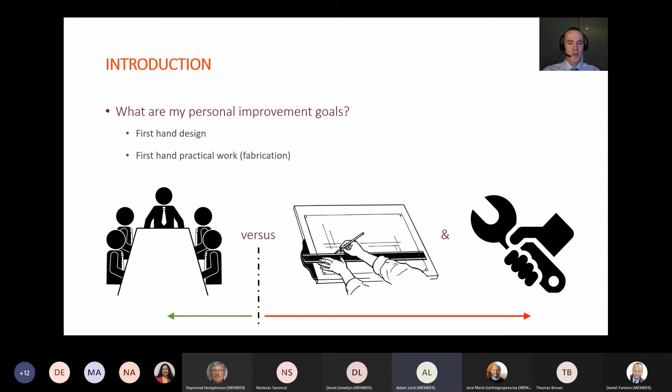So what are my personal improvement goals? I want to increase the amount of first-hand design work and first-hand practical work that I'm doing. If you look at the images at the bottom of the screen, I'm doing a lot of what's on the left, so a lot of work in the office, but less design and less fabrication than I would like.

So, inspiration to close these gaps. I was at the Greenwich Royal Observatory in the UK some years ago, and they've got an excellent section on mechanical timepieces. I was also at the Speelklok Museum in the Netherlands, which has an excellent display of mechanical music machines as well as clocks.

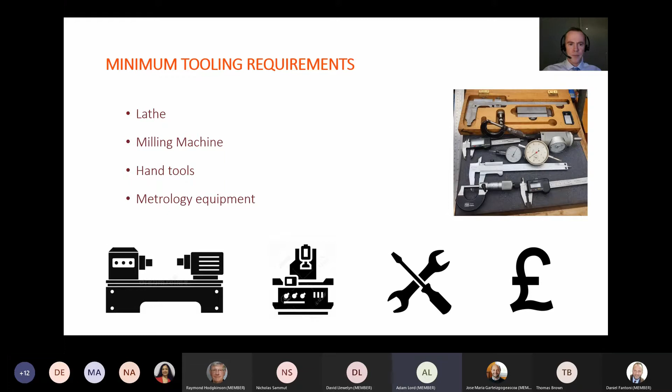What are the key skills that you need? First and foremost, you need patience. You can spend days and days working on the smallest of components, taking it from raw stock down to a finished component with high precision and high surface finish. You need technical drawing skills, both creating your own drawings and interpreting other people's drawings. You need a solid background in mathematics, physics, and engineering, as well as a good understanding of machine tool operation, where safety is paramount. You need to be skilled with hand tools and manual techniques such as riveting, broaching, and filing, and you need to be skilled up in heat treatment.

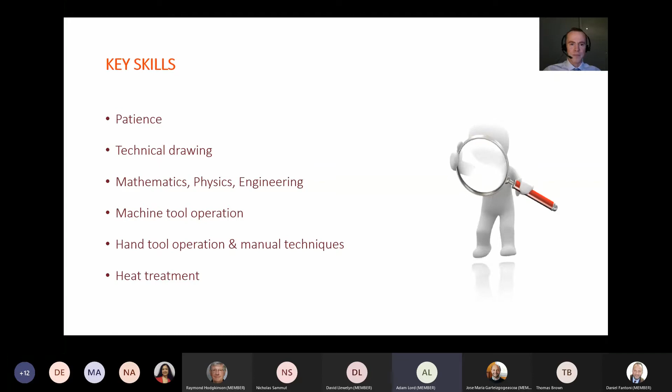In terms of selecting a project, I was browsing through a book on skeleton clocks and I saw a fantastic timepiece, an epicyclic skeleton clock designed by a gentleman called William Strutt in around the 1820s. He was a civil engineer and a member of the Royal Society. One of his famous quotes was that he wasn't that keen on documenting his previous projects, as he was much more keen on getting on to solve future projects and new problems.

So while some of his clocks remain, there were no plans or documentation on how they were designed and their dimensions. So some retrospective engineering was performed by Bill Smith around the year 2000, and he produced a set of plans to cover William Strutt's clock from the 1820s. I came across those plans and based my project around it. It's a fascinating timepiece - it's got an 8-day runtime, a spring-driven fusee, a Ferguson mechanical paradox motion work, and a stop work mechanism as well.

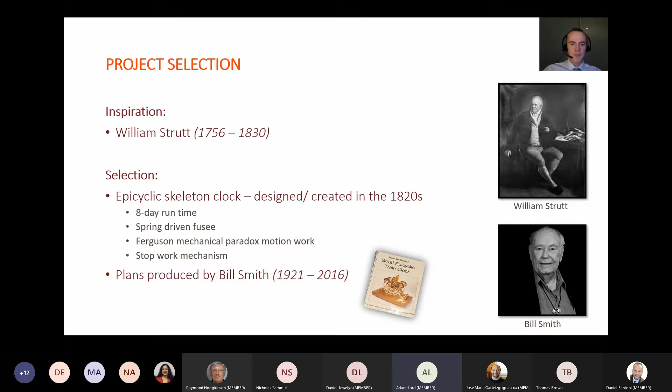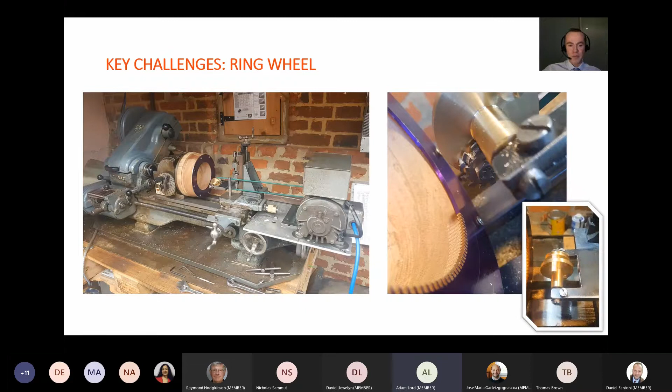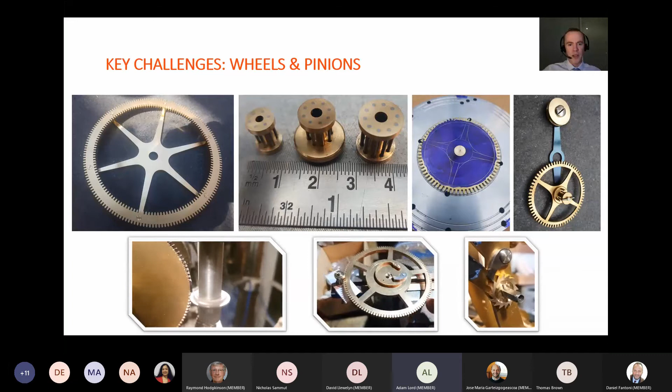You'll hear me talking about wheels and pinions. In horology, a wheel has typically got greater than or equal to 20 teeth, and a pinion will have less than 20 teeth.

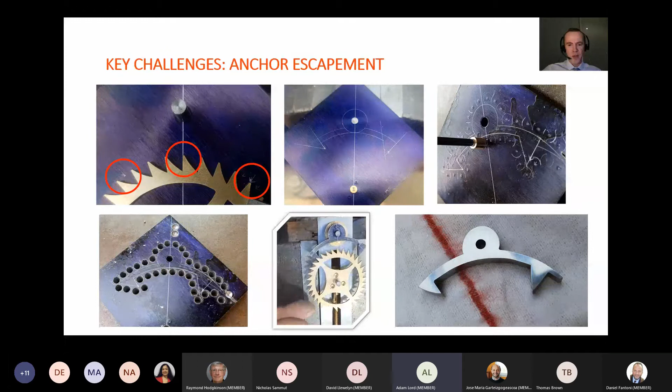Once the material's been removed and the anchor's polished, you can see it oscillating backwards and forwards on the escape wheel. On the far right, you see the final product, which has been polished and heat treated so that it's glass hard and ready for a long service life with very limited wear.

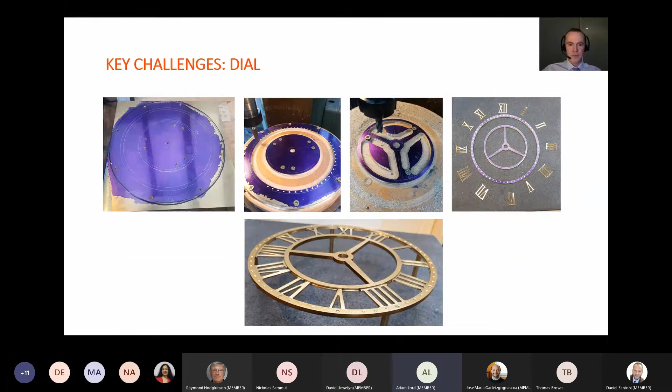The pendulum bob. Traditionally on the lathe, you're either feeding in X or Z at any one point in time, but the pendulum bob typically has a nice curved surface on it, and to achieve such a surface I had to learn a new skill, which was graving, which is essentially turning metal by hand.

Once you've achieved the rough profile, then it's a sanding and polishing operation to impart a mirror finish. Once that's been achieved on one side, then it's cutting the workpiece off, turning it around on a mandrel, and then repeating on the opposite side until you're left with a traditional pendulum bob and a rod as well.

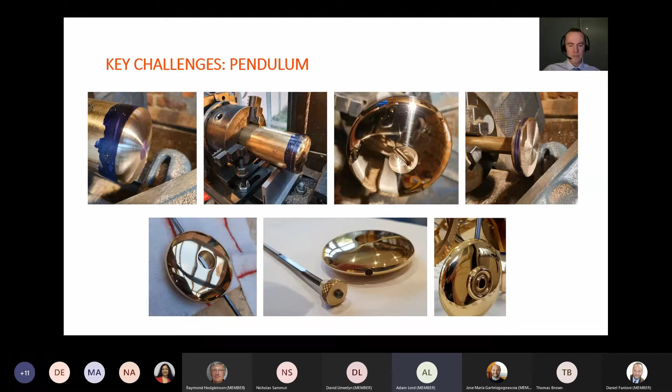Moving on to the fusee. This is a spring-driven clock, and as the spring winds down, it reduces the force that can be applied. So what that would mean is your torque being delivered through the drivetrain of the clock would decrease as the spring winds down. The fusee tries to compensate for that.

This fusee is shaped with a curve here in order to approximate a consistent level of torque being applied through the drivetrain of the clock as the spring goes through its fully wound state until it's in its more unwound state. Quite a tricky operation to thread on a curved surface on a manual lathe, so that was a skill that needed to be learnt for this operation.

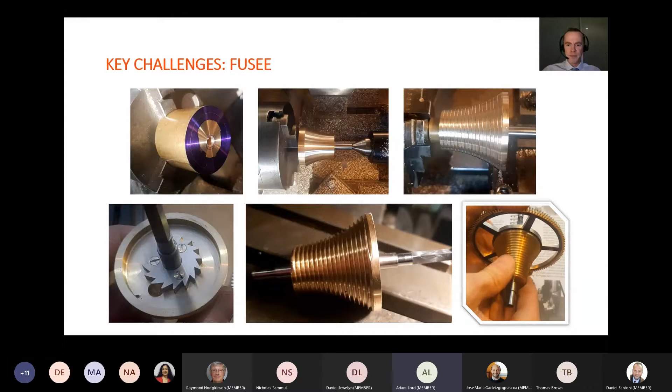On the bottom right, you see the fusee mounted on the great wheel with its ratchet in operation. And then this is the finished clock. Approximately 500 hours of work went into this.

It would undoubtedly be quicker second time around because I've learnt many lessons along the way. Whilst your finished product is a clock, you need a lot of custom-made tooling and a lot of custom-made jigs to create the clock. If I was to build a second one, all that tooling and jig work has already been completed, so there is a potential for significant time savings if it was ever to be a repeat project.

What about my learnings? A couple of famous phrases up at the top: measure twice and cut once. It's a rule I live by. It doesn't always work - sometimes I wish I'd measured three times and cut once - but certainly a good rule to follow. And buy cheap, buy twice.

On a project like this, it's so helpful to have high quality tooling. And by high quality, I don't necessarily mean new. You can often get high quality at a cheap price by buying used.

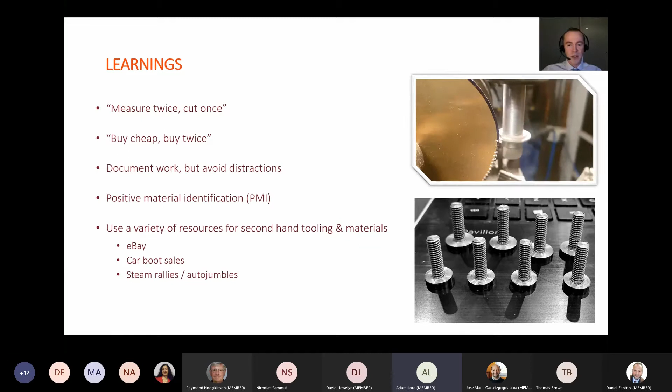What does the future hold? Well, potentially designing a clock from scratch and then fabricating it according to my own plans. But certainly horology will be remaining a hobby and a passion of mine. It really is a good challenge that I enjoy.

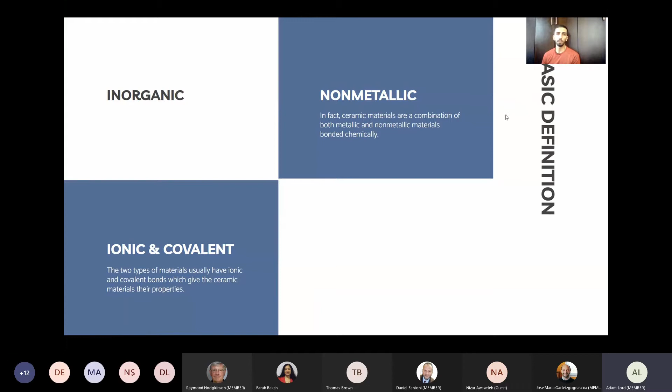So here we see how they depart from metals in being hard and brittle, compared to metals which are ductile. And that can be useful in whatever specific case where hardness and brittleness is desired or required.

They're also great insulators. They're great thermal and electrical insulators, and that is due to their chemical bonds, which do not allow largely the movement of free electrons, which reduces greatly conductivity. They're also very chemically stable due to those chemical bonds. They're also physically wear resistant and very durable, and that is due to their crystalline structure, which is very strong.

Now here, a traditional process of how a ceramic material might traditionally be manufactured. Well, it starts off with the raw materials, which are usually found in powder form. These raw powders are then maybe mixed with additives, depending on our specific situation and any desired properties that we need from those additives. And then when the additives are mixed in, the powders and the additives might be formed into a mold or a cast and compressed, which sees us reach the green state, or the green form as it is known in the industry.

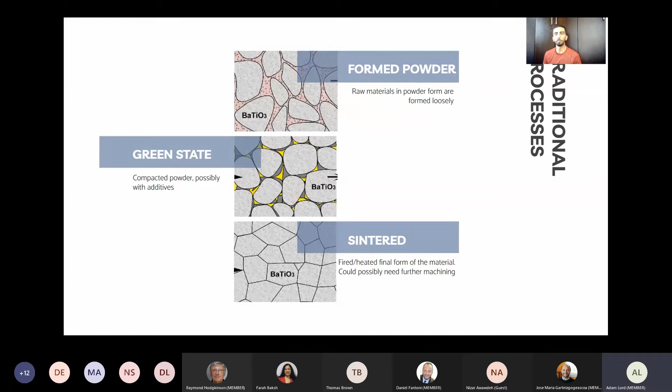Now in this form, we can see in the pictures attached here, the material still has a lot of defects, still has a lot of room for error, for weakness. But it also is a little bit more compact than the raw form. Now we take this green form or green state to be sintered or fired or heated into the final form by reaching specific temperatures, where you can see the crystalline structure form a more compact monolith. Instead of a material with a lot of defects, we have very minimal defects in the final form.

Now, more advanced processes to reach higher and better, more superior properties would see us use rheology, which is the study of flow of materials. Now, this is usually used for fluids, liquids, or gases. However, soft, or in quotation, soft solids, such as powders, can be studied through rheology, and that can help us study how the raw materials would be formed into the mold or cast or press, or however form of manufacturing we would use. That would also help us through the green state of, or the green form of the manufacturing process.

Next is isostatic pressing. It is one of many modern techniques used for the manufacturing of ceramic materials. In isostatic pressing, the raw materials are put into flexible molds, and then those molds with the raw materials inside are submerged into a pressure tank full of water, where that tank would be pressurized, leading to the pressure being divided equally along the whole flexible mold, which is why it is flexible. It allows for the manufacturing of more complex shapes, possibly, and more uniform manufacturing.

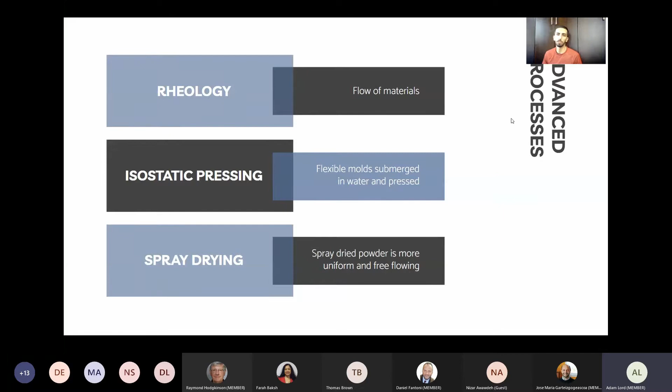There's also the process of spray drying. Spray drying is used for the raw powders, which allows us to create more uniform and free-flowing powders, which are easier to deal with and creates a more uniform and compact final product. Possibly leads to it being stronger or just easier to work with, whatever the situation may be.

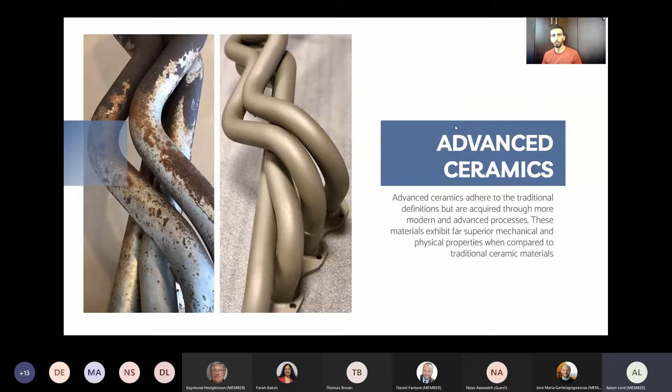Well, it is very durable. The carbon silicon carbide material used for these braking systems has a very strong crystalline structure, pretty similar to that out of diamond, not as strong as diamond, but fairly strong and much stronger than traditional systems using steel.

The silicon carbide is also very heat resistant. And heat resistance in braking systems would greatly reduce the dangerous effects of brake fade.

Brake fade is when braking systems lose performance, possibly stop working suddenly due to the braking fluid boiling, or whatever it may be, due to extreme heat during excessive and repeated wear. This usually happens on a racing track, in sports cars and race cars. Repetitive and aggressive use of the brakes would raise the temperatures really high, up to a point where the braking system might fail. Carbon ceramic brakes greatly reduce those dangerous effects due to their great heat resistance.

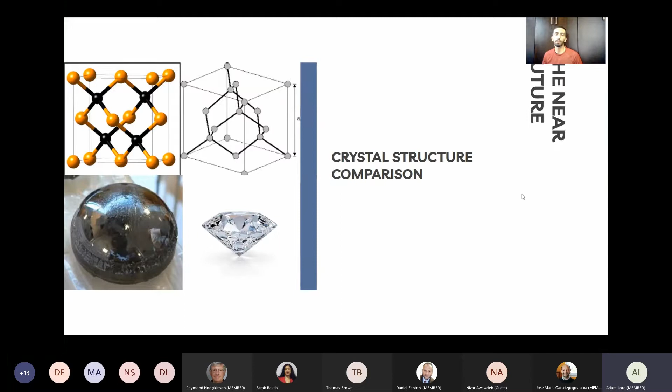And here is the crystal structure I've talked about. Here is silicon carbide on the left with this crystal structure above it. Next to it on the right is the diamond crystal structure. It is not as strong as diamond, but fairly strong and much stronger than steel.

The next highlighted application, also in the automotive industry, is catalytic converters. Catalytic converters are used for emissions control, to control the harmful byproducts of internal combustion. Here a ceramic monolith is used as the base for the metal catalysts used in the chemical reaction. These ceramic monoliths are used for their heat resistance and chemical stability through all those chemical reactions.

Also with their thermal resistance and heat resistance, these catalytic converters can reach operating temperatures up to 1000 degrees Celsius. A material which can take heat very well is very desired, which is why a ceramic monolith would be used in this case.

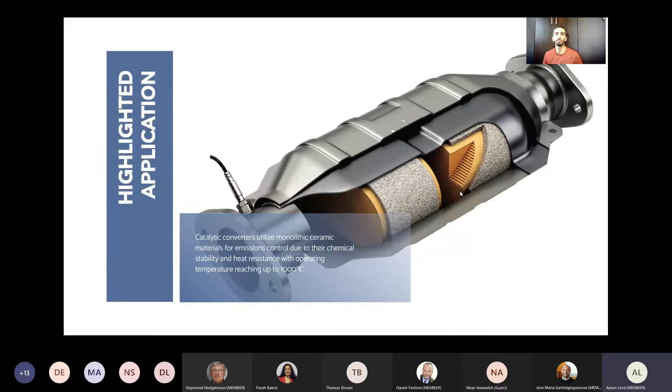Now, to the slightly more exciting part of the presentation, the near future. And I say near future since these are fairly new research papers talking about the future of this field.

The first one is discussing coatings modified with aluminum oxide, used as thermal barriers for advanced gas turbine engines. This research has shown that ceramic coatings modified with aluminum oxide perform thermally far better than traditional designs in uses for gas turbine engines. That could possibly be put to use very soon in the near future.

The next one is high entropy ceramics, where researchers employed artificial intelligence and machine learning to possibly predict formations of high entropy ceramics. This is a great breakthrough using artificial intelligence.

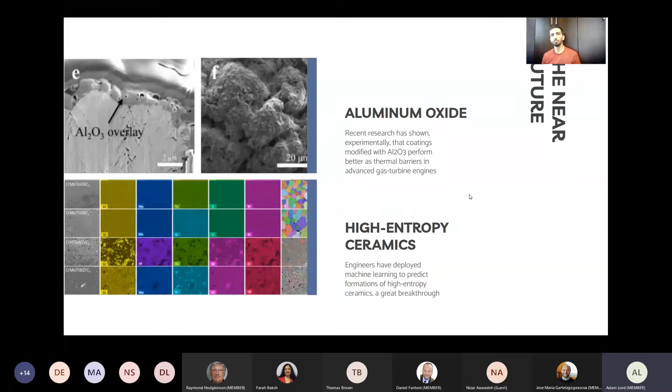It's very exciting. But one thing is, while I was researching this, I did not know exactly what high entropy materials are. So I did a little quick research, and I found it is a fairly new term, which is why I hadn't heard of it until recently. It is a term coined for materials or alloys using multiple different materials in high concentrations, instead of having one main element with additives added on top. High entropy materials or alloys have multiple elements in high concentrations.

Since we were talking about artificial intelligence and machine learning, it makes the future look uncertain, since it's all just predictions of artificial intelligence. However, the present sure does look exciting, as well as the near future.

We are engineers, and for every true engineer, our profession is all about constant change and continual improvement. It's about innovation, about finding ways to make the world work better. And right now, engineering is evolving faster than ever. Outward looking and open to new ideas, it has never been more exciting and daring.

I think machine learning and artificial intelligence will take huge steps forward. Simulation is going to play a more important role. Without a doubt, it will be increased computing power. AI is the electricity of the future. Quantum computers. Low carbon technologies. Cutting down on fossil fuels, making the way we make energy a lot more green.

Getting energy in a sustainable and environmentally friendly manner. I think it's the potential to make a real difference in the world, both in terms of the environment and the economy, boosting the efficiency of how we use energy. And in this dynamic environment, the way we learn, the way we live and work has changed.

Information is instant and everywhere. Knowledge has broken down boundaries. Engineering disciplines are converging, yet engineering careers are diversifying. Everyone and everything is multidisciplinary. The silos and boxes have gone. Artificial intelligence is reframing what is possible. And being an authority is no longer simple or easy.

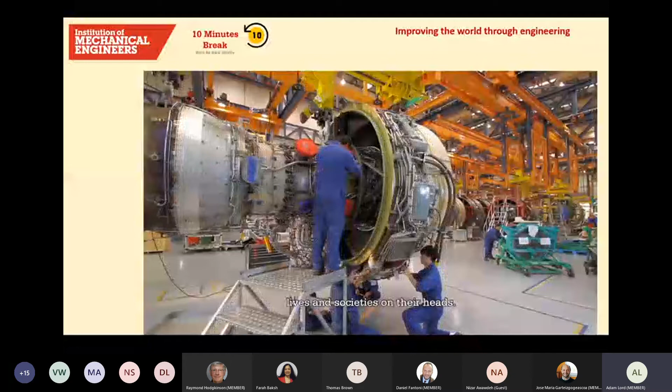The emerging generation of engineers demand relevance, 24/7, 365 days a year. And now that any innovation can turn markets, lives and societies on their heads, they want the opportunity to take responsibility. So what will the institution of the future look like? How will it need to evolve to keep future generations engaged and inspired?

I'd like to be part of a community of engineers that embraces the exchange of ideas. I don't like being siloed. By working all together, we can see the bigger picture. I like to belong to a community where there's plenty of professionals coming from complete outside engineering.

We need to share across disciplines. I think cross knowledge becomes way more important. We cannot just become purely mechanical engineers. We have to have also knowledge from, for example, electrical engineering. But also, during this crossover communication, innovation is often spurred.

Engineers in the future will need programming skills and software skills to better integrate the mechanical system with the software, to promote automation. I'd also like to be able to take any problem to them at any point and receive guidance and encouragement, coming together and really solving problems together as one.

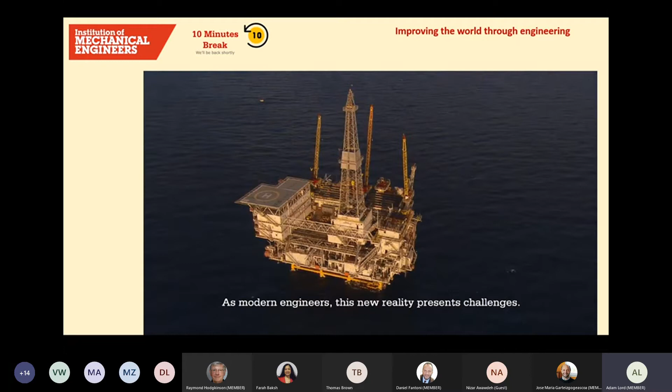As modern engineers, this new reality presents challenges. But most importantly, it presents opportunities. Opportunities to innovate, to invent, to inspire, to create a truly global engineering community.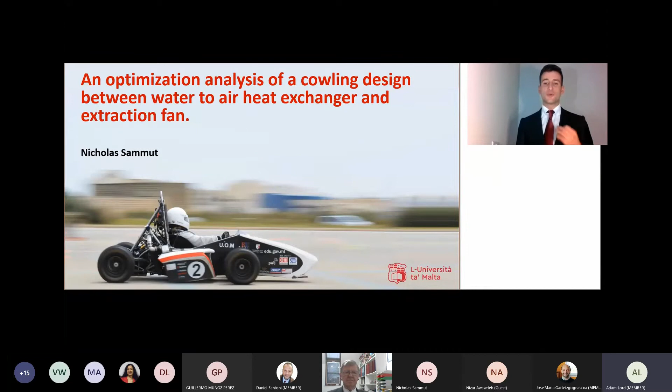Good afternoon everyone, and welcome to my presentation. My name is Nicholas Sammut from Malta, and I'd like to start off by thanking you all for being here and for giving me the opportunity to present my engineering project, which also happened to be my final year dissertation. My project was carried out as part of a much bigger picture, Formula Student, Europe's most established educational motorsport competition, where top universities from all over the world are challenged to design, fabricate, and compete with a Formula-style race car.

Events are split depending on whether they are dynamic or static. The dynamic events test the car's driving ability through the acceleration, autocross or sprint event, a test of handling called skid pad, and finally the endurance event, which is arguably the most challenging and requires the car to drive for around 22 kilometers. On the other hand, static events consist of presentations, and they test the teams in all aspects, including the design of the entire car from an engineering perspective, the ability to budget and account for every part financially in the cost presentation, and finally, actually pitching the car as a product using a complete and holistic business plan.

UoM Racing is our own Maltese Formula Student team. It is made up of over 30 highly dedicated students whose main aim is to represent our country in Formula Student competitions abroad. In fact, our last major competition took place in Silverstone in summer 2018, where we finished 28th place out of 82 teams.

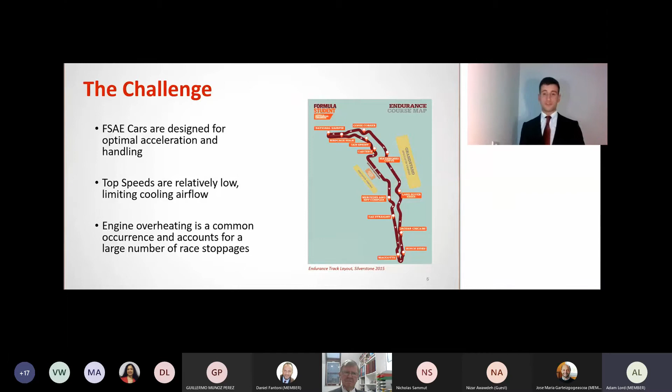Formula Student race cars are designed around a set of very rigid rules. While they are engineered to have high performance in terms of acceleration and handling, they're also designed to operate at relatively low speeds, rarely exceeding 100 kilometers an hour. This is because races typically take place around a very confined track consisting of tight corners, and it is those racing conditions which often push engines to their limits and put a large strain on the vehicle's cooling system. This ultimately results in hot fluid temperatures which exceed the engine's maximum operating range.

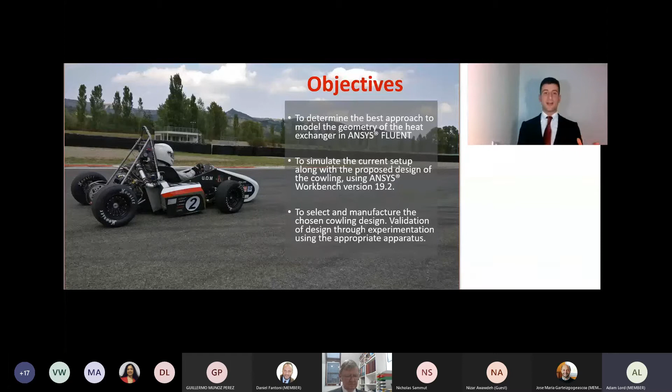This problem was addressed by first determining the most suitable approach to modeling the heat exchanger. Several different approaches can be taken to improve the heat transfer to a radiator, but the main objective of this project was to design and simulate a shroud system to increase the total mass flow rate of air through the radiator, thereby improving the overall rate of convective heat transfer.

This presentation will take you through the entire design process of the shroud, from the first principles and simulation up to the manufacture, and finally the experimental validation of the part.

According to literature, conventional modeling of the heat exchanger would require an excessively large number of elements due to the complex geometry of the radiator fins. An alternative approach, however, is to model the heat exchanger as a porous medium.

To do this successfully, ANSYS Fluent, the software used for this dissertation, requires the user to define two important parameters: firstly, the inertial resistance coefficient, and secondly, the viscous resistance coefficient. For a heat exchanger, the most suitable approach to determine these coefficients is through its pressure drop data, typically in the form of a relationship between the incident airspeed and the corresponding pressure drop across the heat exchanger core. However, the team made use of a custom-made radiator, and with no data sheets available,

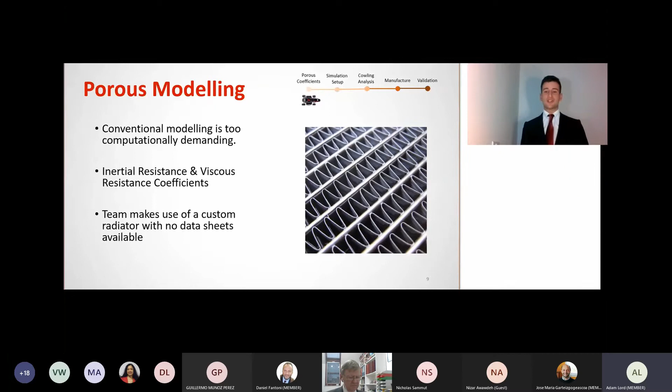these coefficients had to be obtained experimentally in the faculty's wind tunnel lab.

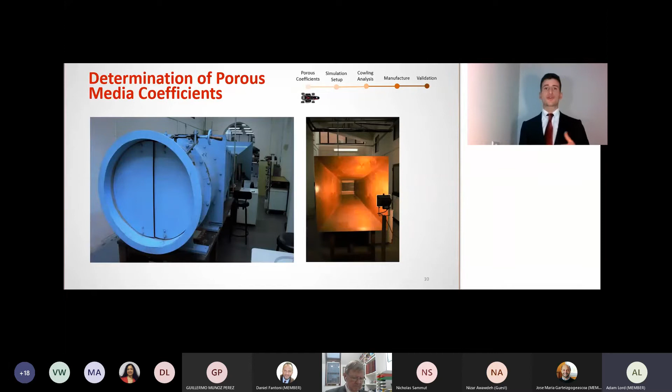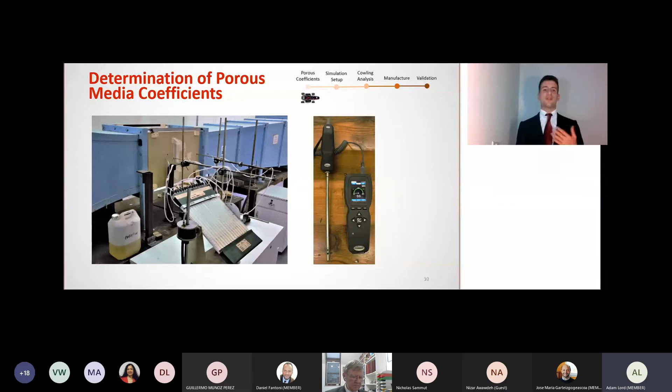The figures here illustrate the experimental setup used for the experiment. The radiator's cross-section was mounted inside the wind tunnel, and a hot wire anemometer was placed in front of the radiator and used to measure the inflow speed. Also, a pitot static tube was placed both in front and behind the radiator to measure the static pressure drop across it. On top of this, additional static pressure ports were created on the walls of the wind tunnel as a reference to increase the level of reliability in the experiment.

The next stage of the project involved computational fluid dynamics software. CFD was first tackled by modeling the current cooling setup at the time, which had the extraction fan directly stuck onto the back of the radiator core.

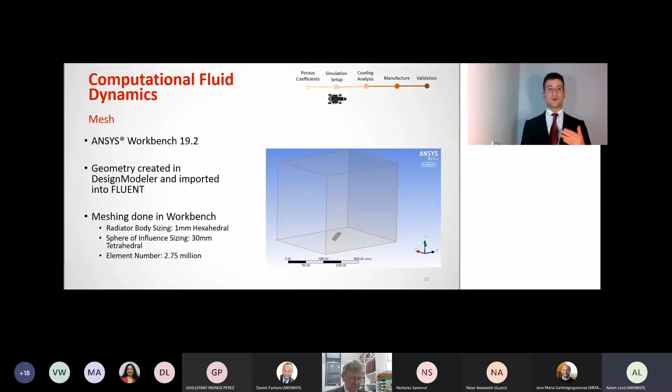This setup was first meshed in ANSYS Workbench, where a fine hexahedral mesh was used for the radiator itself, with a sphere of influence surrounding the zone deemed most crucial. Using a sphere of influence to mesh this localized zone was very helpful, as it allowed for the creation of a much finer mesh to better capture fluid behavior around the radiator.

The accuracy of the mesh was validated through a grid-independent study, and a domain-independent study was also carried out to ensure that the size of the fluid domain used was sufficient to capture the entire behavior of the flow.

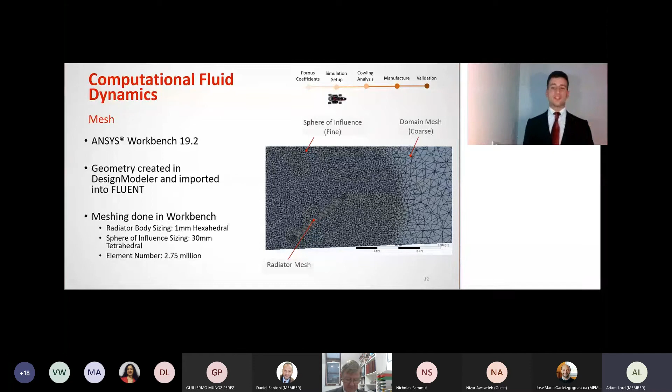The first step in creating the fluid simulation was setting up the correct boundary conditions and viscous model. Through the literature study, it was determined that the K-epsilon realizable model was the most suitable for this application. It is often presented as the default model setting in many commercial software packages.

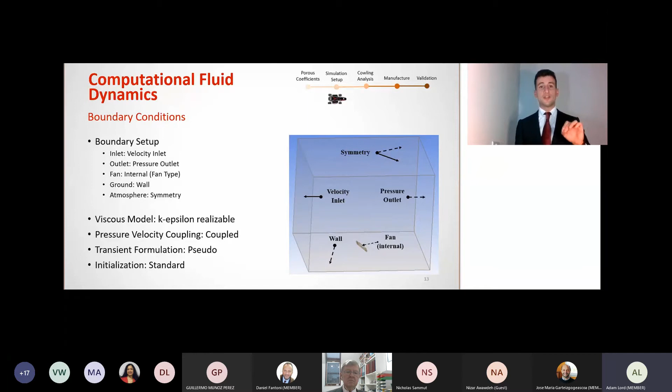After importing this model into ANSYS Fluent, the radiator could then be defined as the porous zone, and it was at this point where the coefficients obtained previously could be input for the relevant direction vector of the flow.

The fan itself was declared as an internal fan zone, modeled as a specified pressure jump. This was done by first obtaining the pressure drop data sheets provided by the fan manufacturer.

Post-processing was done on simulations both with and without the fan, to compare both models and ensure that the fan was operating as expected. In all simulations to follow, the velocity and static pressure were the variables of interest.

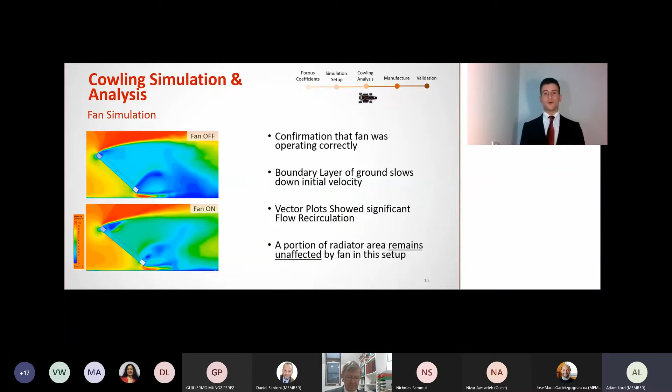Once the original radiator configuration was correctly set up, the next step was to design the shroud and analyze its effects on the airflow. These figures illustrate one of the runs at 4 meters per second.

One can see how without the shroud, the pressure drop is again localized around the fan area only, while with the shroud mounted, the entire portion of the radiator is affected by the pressure drop.

These effects can be most visibly seen in the graph alongside the contours, which plots the air inflow speed against the mass flow rate, plotted for both configurations.

The mass flow rate was obtained using Fluent by finding the surface integral for mass flow rate at the radiator interface. As expected, the mass flow rate with the cowling is significantly more than without.

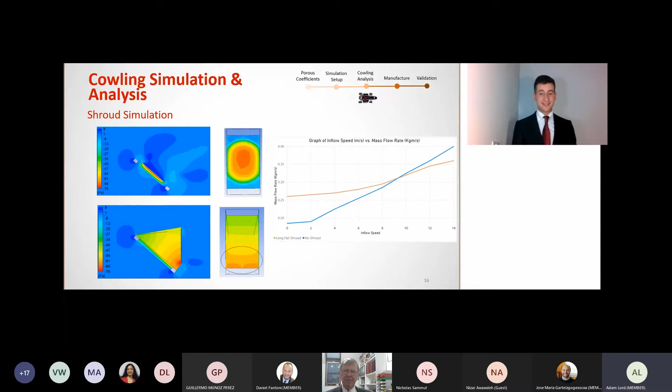However, this effect is most notable at lower speeds, and beyond a certain speed, not only do the mass flow rates level out, but at higher speeds the shroud actually begins to act as a blockage and has a negative effect on the mass flow rate. But having said this, it is at these speeds that the effect is most critical.

Over here we have a graph which shows the speed of one of our race cars in a typical endurance event, lasting for 22 kilometers. Many times the speed of the car is seen to dip well below 10 meters per second, probably when turning a tight corner, for example.

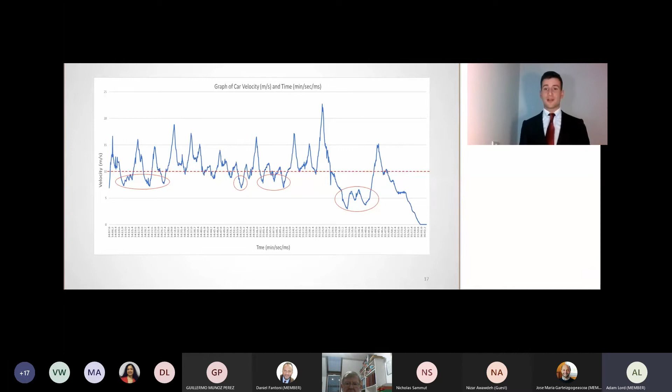But this is when it becomes important. On top of this, midway through the endurance race, there is a required driver's change, where the car ignition must be turned off as the driver transitions, but the fan can be left on. At this stage, engine overheating is a very common occurrence in competition during this time because of the lack of airflow, and so the introduction of a shroud can produce mass flow rates when idle which are comparable to when the car is traveling at 6 meters per second without a shroud configuration.

With the potential effects of the shroud clearly visible, the next step was to analyze different geometries and their mass flow rates with the shroud. Surprisingly, 5 different cowling designs produced extremely similar mass flow rates, but what was different was the way that the flow was distributed for each shroud design.

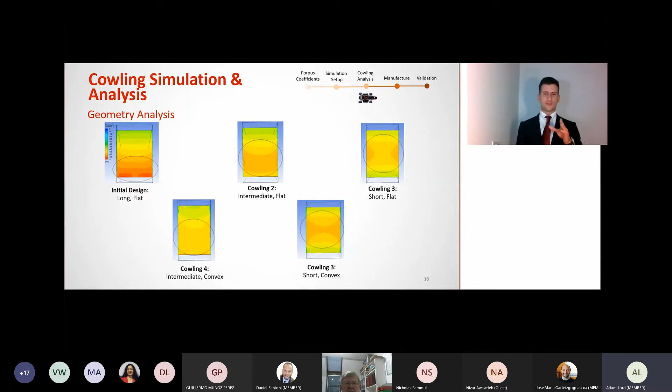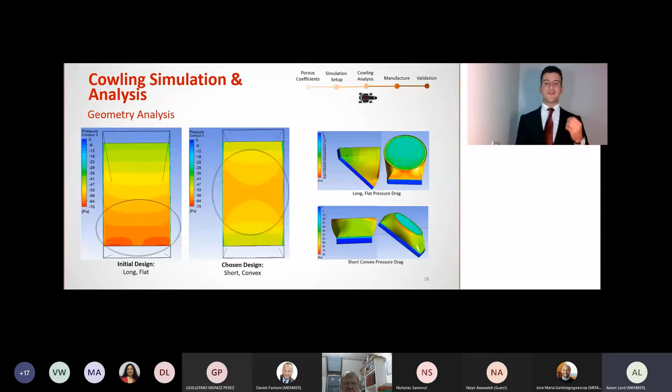In fact, the distribution of flow for the initial design, as you can see in the first visual, is not even. The largest pressure drop is concentrated in a localized area towards the bottom portion of the radiator. By shortening the shroud geometry and introducing a more convex shape, flow distribution was actually improved. The drag over the cowlings was also examined and found to have negligible effects on performance. So in the end, the short convex shroud was chosen for manufacture, firstly for being the lightest design, but most importantly, for showing the most ideal flow simulation and flow distribution.

It was then decided that the material used for manufacture would be carbon fiber because of its lightweight nature and its high temperature resistance. In addition, the team has been fairly experienced in carbon fiber manufacture and has had the resources available to carry out a task such as this.

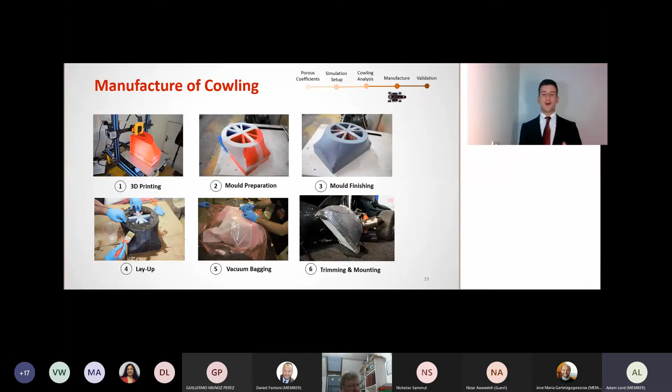The mold itself was 3D printed due to the complex convex geometry, and this was followed by a carbon fiber wet layup under vacuum. Not only is the wet layup technique the simplest and cheapest method of composite manufacture, but it allowed for the part to be cured at room temperature, posing no risk of melting the mold it was based from.

And this is the final result: the entire configuration of the shroud, radiator, and cooling fan.

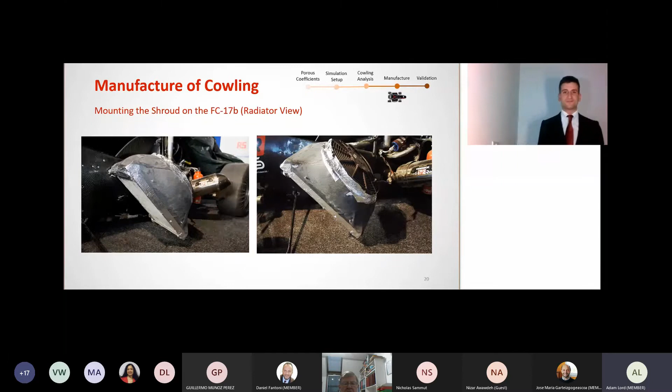Now, a critical part of any computational simulation is establishing a reasonable amount of confidence in the results obtained. So validation of the CFD simulations was done in two parts. The first part consisted of a non-invasive experiment focused on finding an area-weighted average of the velocity of inflow through the radiator, using a hot wire anemometer to record the inflow air velocity at several marked points on the radiator face, as you can see in the picture here. An identical simulation was then set up in ANSYS and compared to experimental results.

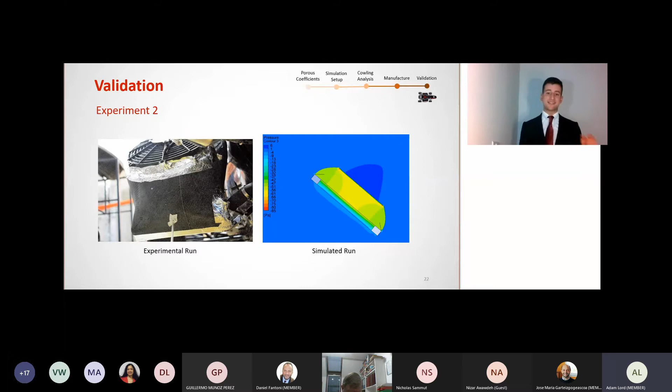The second part involved a single static pressure tapping at a suitable location on the shroud, allowing for a direct comparison to the pressure found at the same location in the simulation. A discrepancy of 17.7% was found in the first experiment, and similarly 17% in the second. This level of discrepancy was deemed sufficient, especially since the fan was simply modeled as a pressure jump, ignoring the effects of swirl and the fan blades.

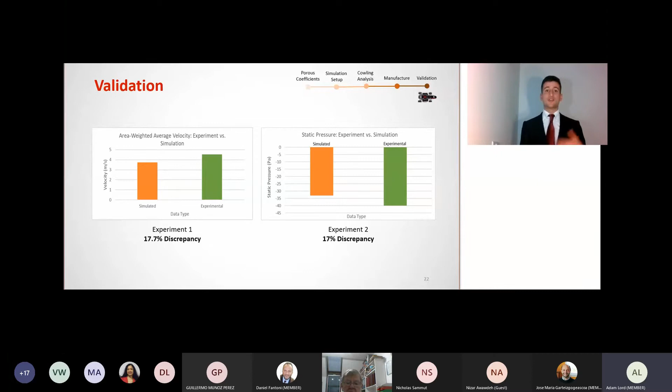So it was concluded that there was enough confidence in the study for it to be replicated and developed on in future simulations by the team. The successful modeling of the radiator's air domain in reality was just the first step to obtaining a complete heat transfer simulation of the heat exchanger. Together with a working model of the radiator's water domain, the ultimate objective is to be able to accurately size the radiator via simulation.

Similarly, as well as the radiator, a separate study can be focused on obtaining an accurate model of the fan itself, perhaps by using the moving reference frame approach. Optimization of the fan itself could bring a lot of potential benefits to the race car, namely significant mass reduction and energy savings on the power budget of the car.

I would say that overall, the most rewarding part of this project was being able to contribute to the team after being in it for my whole university career. And it was great being able to widen my knowledge in computational fluid dynamics, especially, and this giving the team the ability to have a more competitive edge in its future Formula Student endeavors.

So that was my presentation. I hope you enjoyed it, and I'd be more than willing to answer any of your questions.

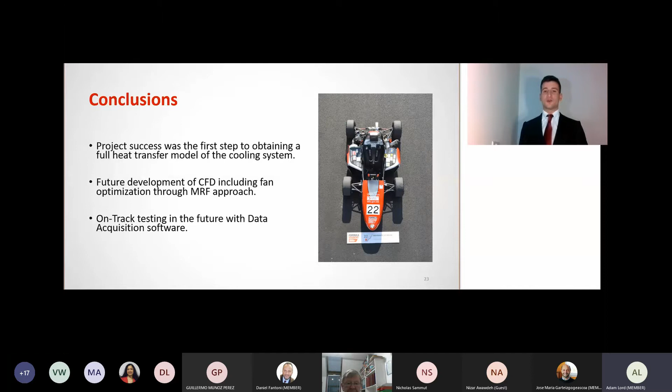Thank you very much, Nicholas. Back to you, Raymond. Daniel, would you like to go first? Yes, here I am, once I'm connected. Thank you very much, it's a very interesting presentation. Thank you, thanks a lot.

I was wondering, your experiments were on a specific car, a specific type of circuit. Did you discover any general rules for how you would be able to design shrouds or solve the problem in other situations? Other situations, I think you mean beyond Formula Student? Yes, commercial applications or something more.

Okay, so actually, the problem which we first realized was that our engine was overheating a lot, especially during testing. After doing research and discussing with past team members and even sometimes other teams, many of them designed a shroud cowling system to improve the airflow, especially when the car is traveling at lower speeds. In fact, it's used very often nowadays in automobiles and normal cars. Of course, when you're waiting in traffic or at a red light, you need a good amount of airflow through the radiator, and that becomes 100% reliant on the fan. Having that shroud can really optimize the airflow through.

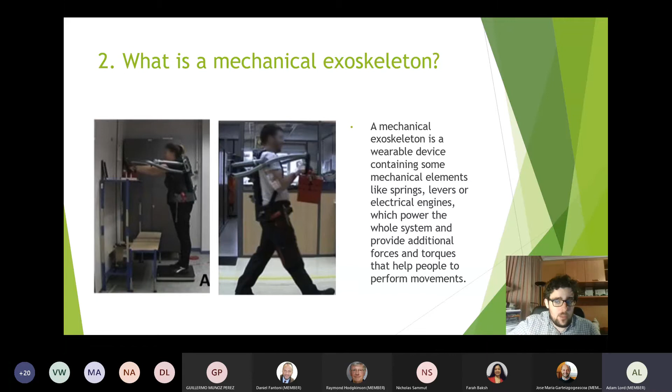I want to say that the exoskeleton is not a substitute for the human body in performing the movement. The exoskeleton provides additional help, but the person wearing the exoskeleton must start the movement. The exoskeleton is an additional help.

There are two types according to the form of energy. In first place, active exoskeletons are powered by an electrical engine that produces an assisting torque. These exoskeletons are more difficult to produce, more expensive, and more complicated, but they provide more torque because they have an electrical engine, so they are more useful.

On the other hand, we have passive exoskeletons whose energy is produced by elastic elements like springs and dampers. This energy is stored and is released during the motion.

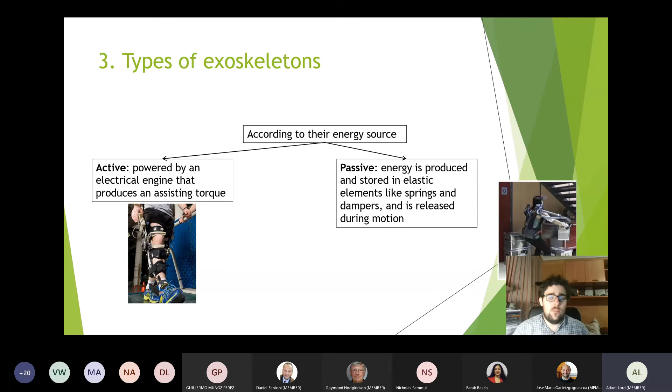According to their use, we can classify exoskeletons into three types. In first place, medical exoskeletons, designed to help victims of diseases and accidents perform diverse motions. In second place, industrial exoskeletons, designed to help workers in the industry perform certain movements or stay in a position for a long time. In third place, military exoskeletons.

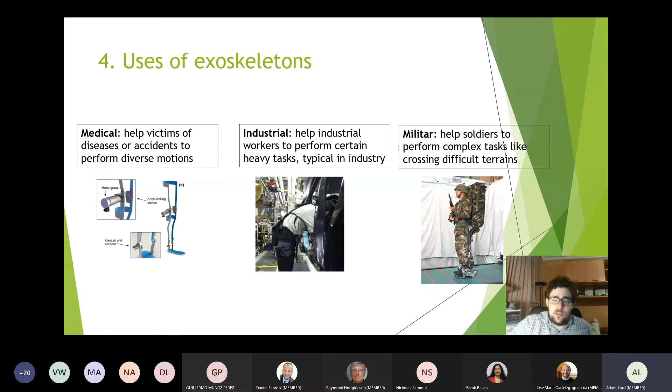Military exoskeletons are designed to help soldiers perform difficult tasks, for example crossing difficult terrains, and to help members of the armies. In this picture, we can see a soldier from the United States Army wearing a mechanical exoskeleton.

Now I'm going to tell you about experiments made with passive exoskeletons. I remind you that a passive exoskeleton contains springs and dampers which store the energy and release it during motion, but they do not have an electrical engine. They are not as powerful as the active exoskeletons.

I would like to start with the LAEVO exoskeleton, and experiments made with LAEVO. LAEVO is one of the most representative exoskeletons that exists nowadays. It is connected to the body through the back, the chest, and the thighs, and is designed to help people move the upper limbs.

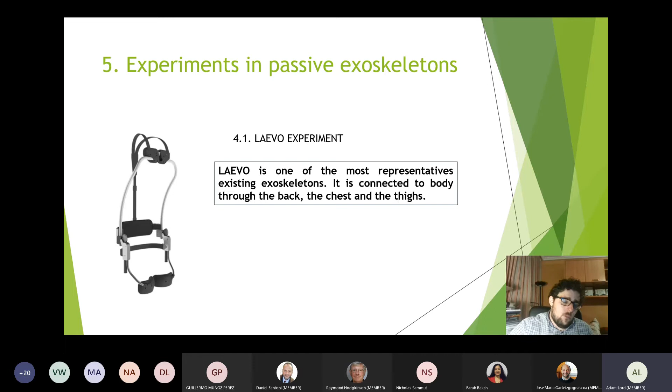I'm going to tell you about an experiment made four years ago by some scientists. They wanted to study the influence of this exoskeleton when workers were making some typical tasks in the industry. There were two tasks studied.

In the first task, the person had to simulate an assembly. They had to bend their back and take a piece, then spin their back and assemble the pieces they had taken.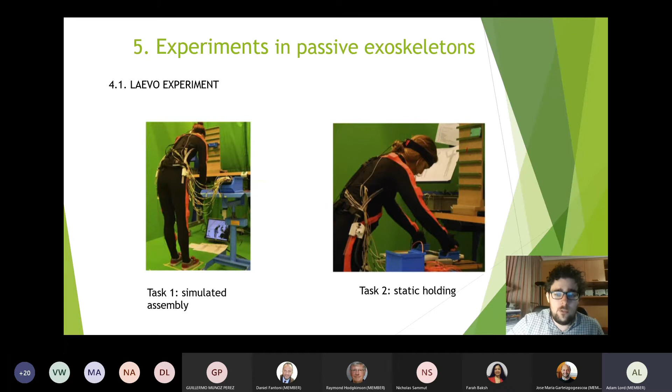In the second task, which was more simple, it was only a static holding. They had to hold their back static with a certain degree of bending.

The results of the experiments show that wearing the exoskeleton, the person had to make less effort, so they were less tired. This is good because the exoskeleton is fulfilling the objective of helping the person who is wearing it to make the task easier.

In the first graph, we can see the electrical activation of the muscle is less when wearing the exoskeleton, in both the first and second tasks. In the third graphic, the discomfort was studied. It's important to speak about discomfort because one of the objectives of exoskeletons is not only to help people perform movements, but also to be as comfortable as possible.

I have to remind that an exoskeleton is a heavy device—it can weigh like 6 or 7 kilos, so it's a heavy device you are wearing, which could be uncomfortable. So it's important when designing an exoskeleton to make it as comfortable as possible. In this experiment, we can see that in the legs, the exoskeleton was annoying the person more than without it, because the discomfort is bigger.

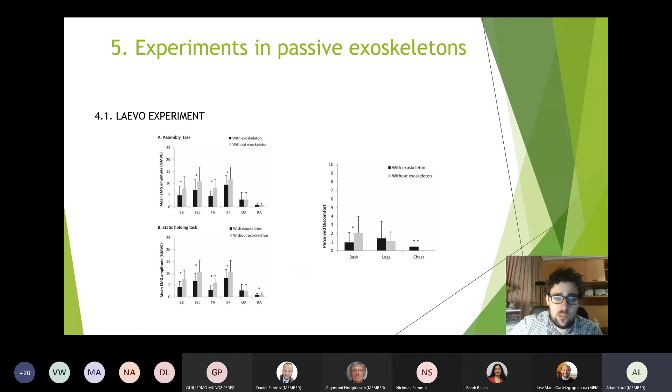Now I'm going to tell you about the next exoskeleton. This is another exoskeleton also designed to perform tasks involving upper limbs, like the previous one, and it can also be useful for industrial workers.

This experiment is very similar to the previous one. Workers were asked to perform three tasks typical in the industry. Here we have the three tasks.

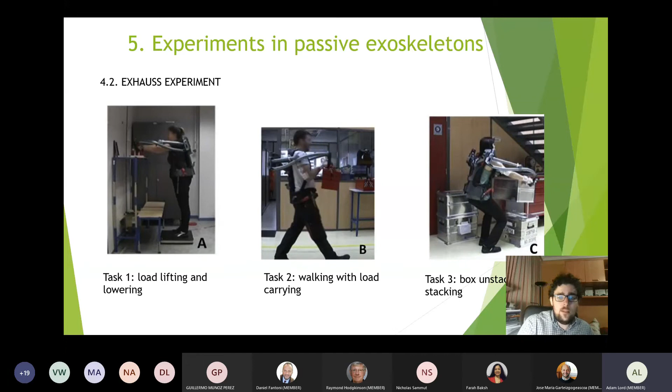In the first task, we have the woman lifting a load and lowering it to a lower height. In the second task, we see an individual carrying a load and walking with it. In the third task, another individual is unstacking a box on the left side, spinning their body, and stacking it on the right side.

The results in this experiment show that the muscle activity is bigger wearing the exoskeleton in some muscles, for example in the tibialis anterior and the triceps brachial. The activity wearing the exoskeleton, in black, is bigger. So the exoskeleton is not fulfilling the function to make the movement easier for the person wearing it.

So this exoskeleton is not fulfilling its function in the lift task. In the other task it happens the same. In the stack task, the muscle activity is bigger in those muscles, the tibialis anterior and the triceps brachial.

Only in the walking task is the muscle activity smaller wearing the exoskeleton. It's in this task only that the exoskeleton fulfills its function.

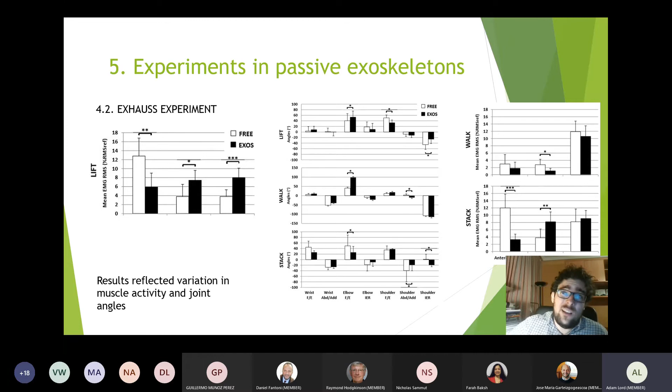In this central graphic, we can see the deviation angles in the three tasks: lift, walk, and stack, in some muscles and joints. In some joints the deviation angle is bigger wearing the exoskeleton, which is good news because the exoskeleton allows the joint to bend more, but in some muscles it happens the contrary. So we can see that the exoskeleton is not as good as desirable, not as good as the previous exoskeleton.

Now I'm going to talk about an experiment that a professor of the University of Sevilla, Professor García Vallejo, and I studied. We made an experiment with this active exoskeleton. This is the SCKAFO Experiment, with the SCKAFO exoskeleton.

This exoskeleton is active because it has an electrical motor which provides an additional torque to the person wearing it. It also has an artificial ankle which makes bending the ankle easier.

In this experiment we studied the influence of the device on a walking gait cycle performed by individuals. These individuals had suffered a spinal injury. They wore the exoskeleton, and we made changes in its parameters, studying the magnitude of these changes.

As you can see, this exoskeleton is wearable only for the legs. It's designed for the lower limbs.

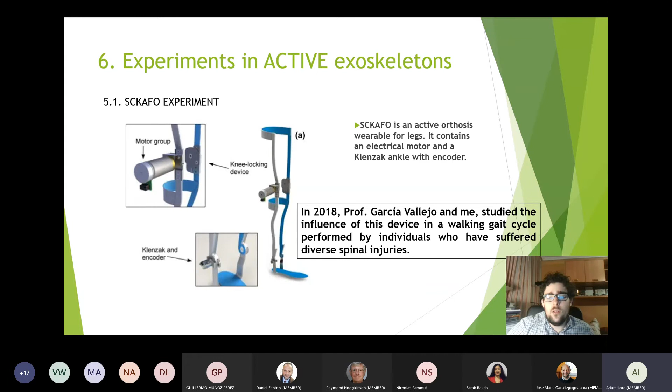I'm going to show you the mathematical model of the person used to perform the experiment. It's a model centered on the lower limbs, because we only use seven bodies: the hat, which is the pelvis, the two thighs, two shanks, and the two feet.

We use 9 generalized coordinates: 3 for the trunk, 2 for the angles of the pelvis, 2 for the angles of the knees, and 2 for the angles of the feet, the ankles. As I said, we changed parameters in the orthosis and analyzed the deviations.

Now I would like to show you the most remarkable results we obtained in this experiment. Firstly, in the first graph, we represent the vertical coordinate of the pelvis versus the normalized time, where we took the time and divided it by the maximum time.

In the green line, we can see the person wearing the original exoskeleton without changes. In the red line, we see the vertical coordinate of the person wearing the exoskeleton after an increase of the moment of inertia of 5%, making the exoskeleton heavier. The blue line represents the person wearing the exoskeleton with an increase of 10% of the moment of inertia.

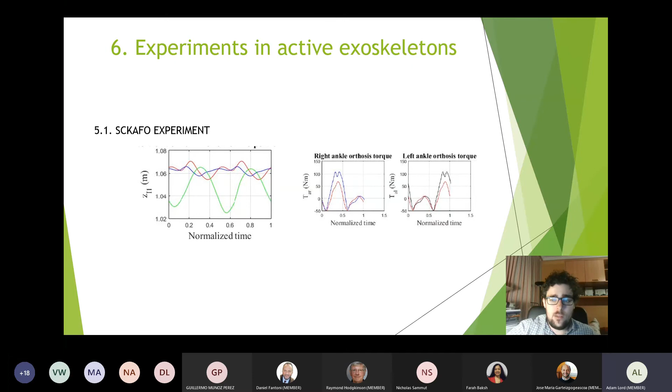So this means that this exoskeleton does a good job, making the movement easier for the person wearing it. So I would like to finish with some conclusions. First, we can see that exoskeletons may suppose an important improvement in our life quality, because we have seen that they allow us to perform some movements in difficult situations.

We can see that some movements are easier to perform wearing the exoskeleton. But another conclusion I've taken from this is that further research must be done, because as we said, some exoskeletons can be an obstacle to making the movement, since the discomfort could be bigger. Even the movement performed by the human body could be bigger wearing some exoskeletons, and this is not the objective of the exoskeleton.

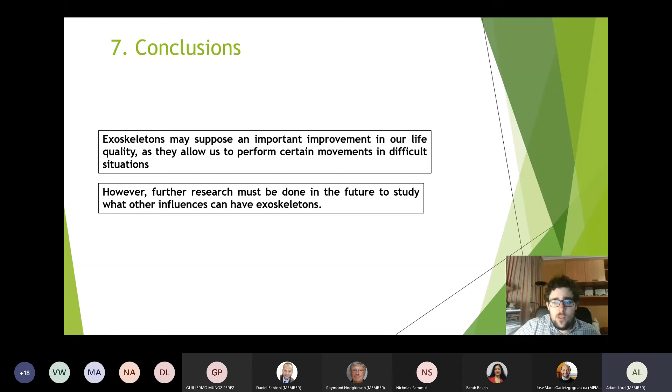Okay, so now I open it up for your questions. Thank you for paying attention to my presentation. Thank you very much.

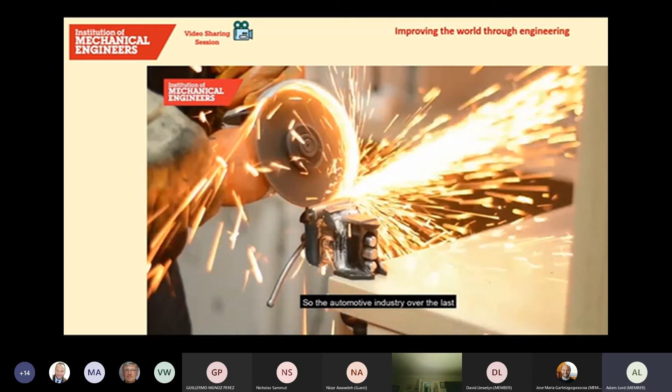Not just decarbonising, but there are many global megatrends that have been occurring that have had quite a profound effect on the automotive industry. The fact that more people now live in cities, the fact that we're now digitally connected, the fact that we have to decarbonise - lots of things have forced the industry to change, and I think over the next 10 years we're going to see even more change.

Even considering the fact we've now got to deal with the COVID situation, how that plays out and the impacts that will have - and it will have impacts - we are going through an unprecedented change. So I thought it'd be quite interesting to focus on the future of mobility. My presidential address will look at how that's going to play out, what is going to happen over the next 10 to 20 years, and what we can expect by when.

I think it's quite an exciting time. It'll be quite an interesting story to tell. I've been to many presentations where people talk on this subject, and it is - whether you're an automobile engineer or not - an interesting subject because we all drive cars, we all use them to get around. So how it's going to change over the years now is going to be really interesting.

I think if we can bring that down to the realest possible image of what's going to happen, when it's going to happen, and what it's going to look like, then I think that'd be quite an interesting story to tell. So that's going to be the theme of my address, and certainly one of the key themes I'll have through my year as president.

So that's a really big and challenging subject. And you did mention both climate change and COVID-19. There's the possibility we might experience conflicts between those two issues—fewer people wanting to use public transport because of COVID-19, leading to an increase in private car use, which is maybe undesirable. Do you think that will actually be a challenge for the future of mobility, or will it resolve as we understand more about coronavirus?

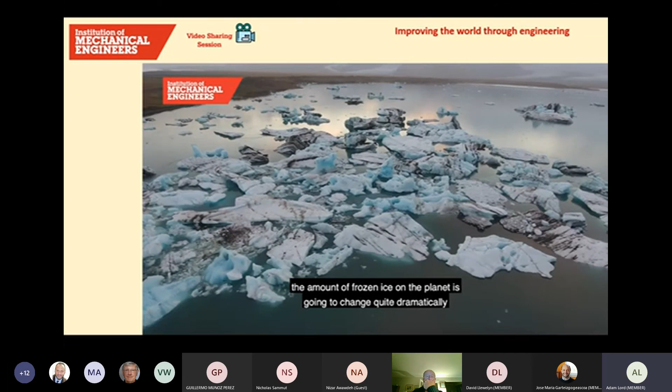The effects of global warming and climate change mean that potentially the amount of frozen ice on the planet is going to change quite dramatically in the coming centuries, indeed potentially in the coming decades. That'll mean we might see significant changes of sea level during the lifetime of a lot of the infrastructure and engineered buildings that we construct, operate, maintain, and decommission.

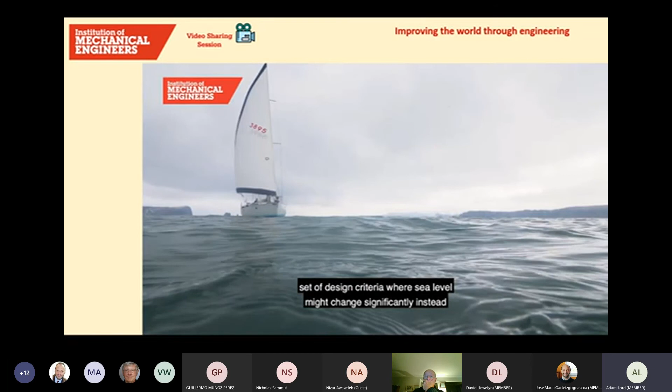So we're entering a new epoch where potentially we as engineers have to deal with a completely different set of design criteria, where sea level might change significantly instead of remaining stable over that period of time. So that's essentially the background to the work that we did.

Thanks, Tim. And I know that you produced this with other members of the institution. Can you tell me a bit about the decision-making process? Why did you and other members feel that this was something that the institution should tackle?

About a year and a half ago, myself and some other members became aware of an emerging body of evidence from around the world, from very reputable organizations, indicating that sea level might rise quite significantly more than the IPCC has been projecting. The current worst case scenario from the IPCC is a sea level rise of about 1 meter over the course of the century, which in itself is quite significant.

Particularly organizations studying the polar ice caps have been indicating that sea level rise might be significantly underestimated. For example, the National Oceanic and Atmospheric Administration has indicated sea level rise might be as high as 2.7 meters by the end of the century. This rise will largely come from melting of land ice in Antarctica and Greenland.

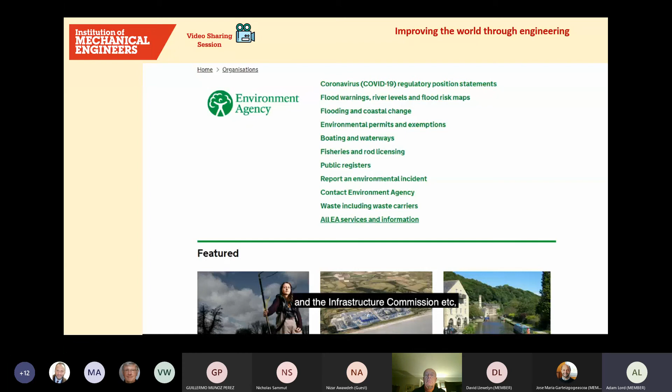And that has indeed continued since the publication of the work. We've continued our engagement with the Environment Agency. They're very familiar with the work that we're doing, and we've been providing further input into their strategies and thinking. And we've been working with the National Infrastructure Commission and a body called the Infrastructure Operators Adaptation Forum, that brings all of the UK's major infrastructure representatives from those companies and organisations together. And we've been informing them of our work and looking to work with them going forward.

So yeah, and of course that's where, as volunteers within the institution, it becomes somewhat challenging, because clearly there's a significant amount of volunteer work in producing the reports themselves, but it's a question then of sustaining that volunteer commitment and contribution for the long haul in terms of the onward engagement with government. So that in itself is a challenge in the work that we do at the institution.

It is, but it's also, I think, our volunteers are one of our greatest strengths too. So being able to access all of the knowledge in the way that you did has really demonstrated some great recommendations and some great follow-up to that as well.